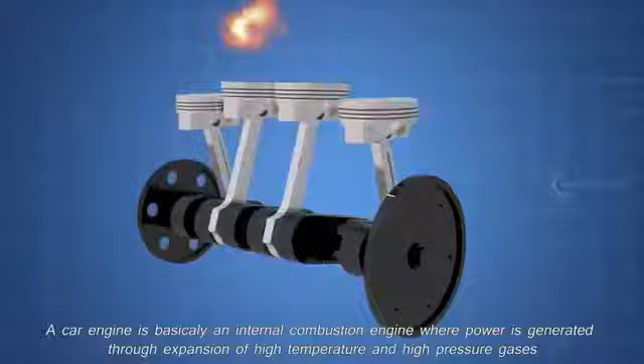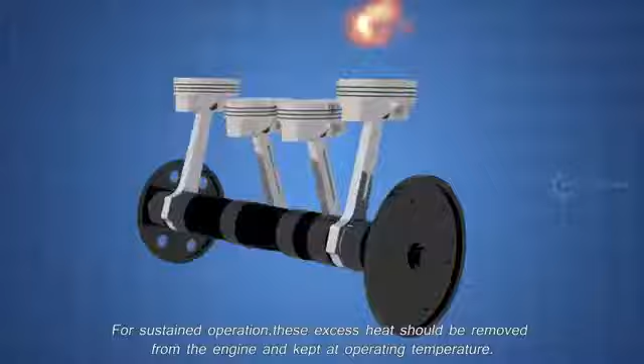A car engine is basically an internal combustion engine where power is generated through expansion of high temperature and high pressure gases. A lot of heat is generated due to the combustion gas and the friction of mechanical parts. For sustained operation, this excess heat should be removed from the engine and kept at operating temperature.

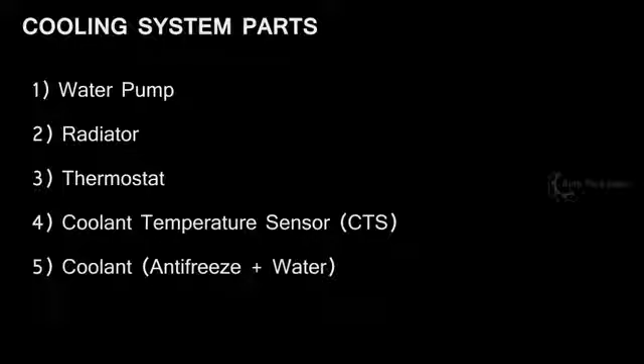Now let's see the parts involved in cooling the engine. The main parts for cooling the engine are water pump, radiator, thermostat, coolant temperature sensor, and coolant.

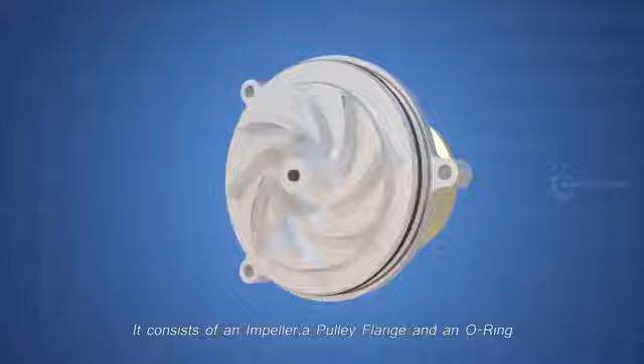First, the water pump. The water pump is the heart of the cooling system, which pumps the coolant. It consists of an impeller, a pulley flange, and an O-ring. The impeller is driven by the engine drive belt through a pulley.

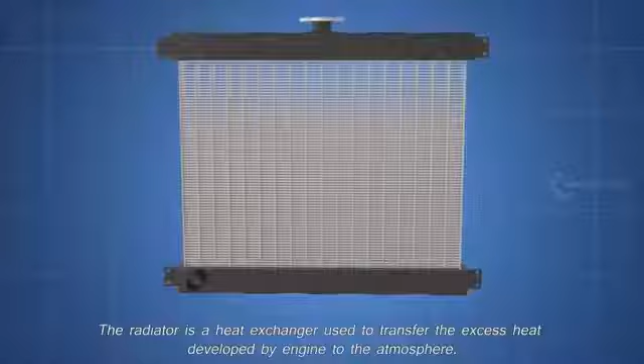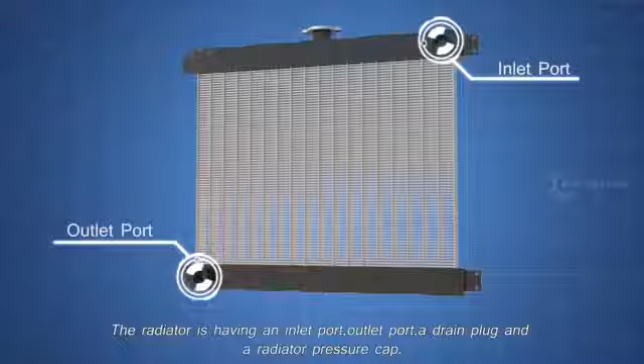Next, the radiator. The radiator is a heat exchanger used to transfer the excess heat developed by the engine to the atmosphere. The radiator has an inlet port, outlet port, a drain plug, and a radiator pressure cap. The radiator pressure cap plays a vital role in the cooling system, which will be explained later.

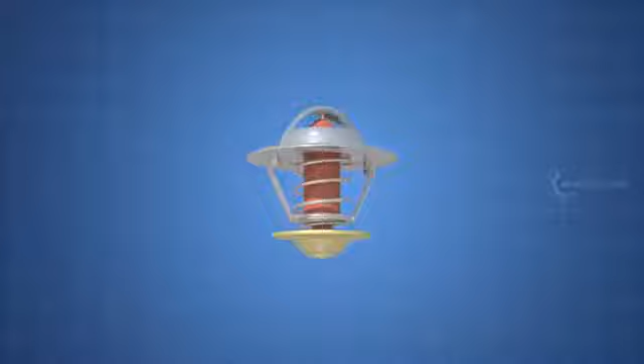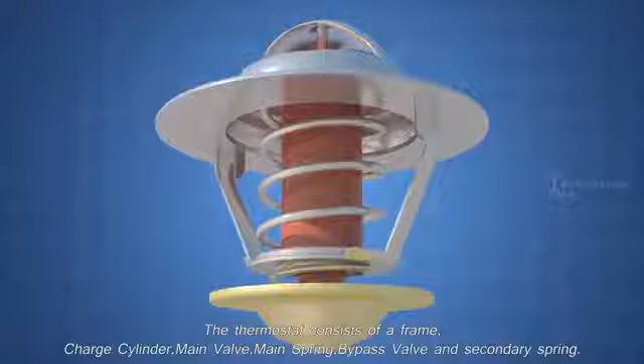Next, the thermostat. The thermostat is a valve which regulates the flow of the coolant and helps maintain the proper operating temperature for the engine. The thermostat consists of a frame, charge cylinder, main valve, main spring, bypass valve, and secondary spring.

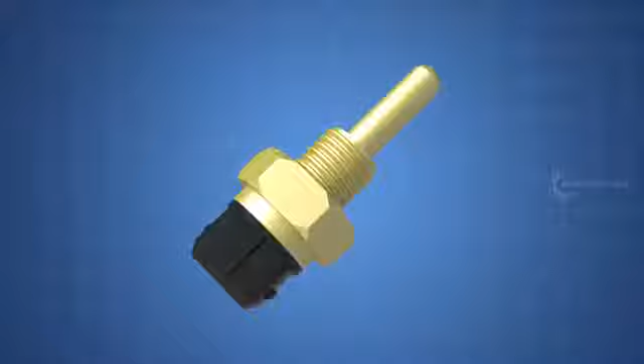Next, the coolant temperature sensor. The coolant temperature sensor is used to monitor the engine temperature. The ECU will use this data to manage fuel injection and ignition time. Some engines have more than one coolant temperature sensor. The data is also used to control the radiator fan and to update the temperature gauge on the driver console.

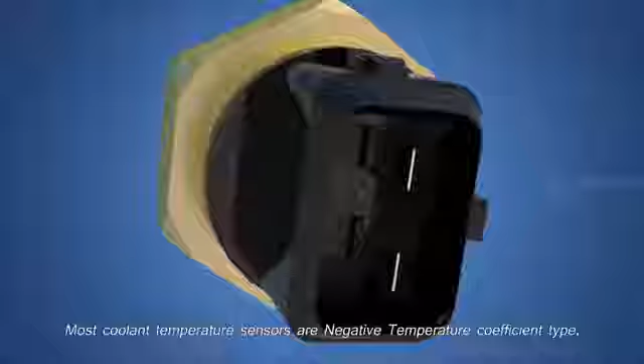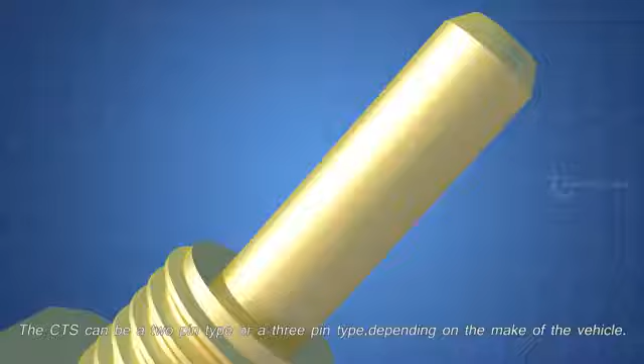The coolant temperature sensor consists of a sensing probe and an electrical connector. Most coolant temperature sensors are negative temperature coefficient type, meaning as the temperature increases, the resistance decreases. The CTS can be a 2-pin type or a 3-pin type, depending on the make of the vehicle. These are the main parts involved in an engine cooling system.

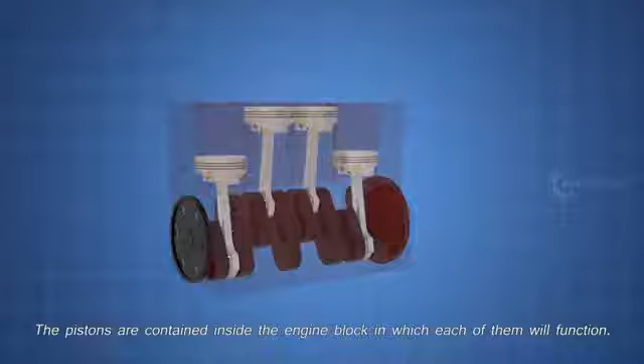Now let's see how these parts work together. The pistons are contained inside the engine block, in which each of them will function.

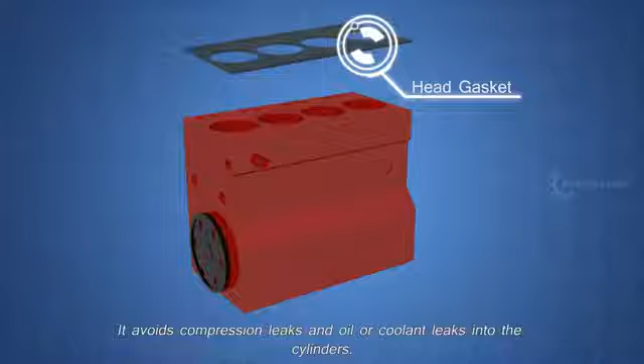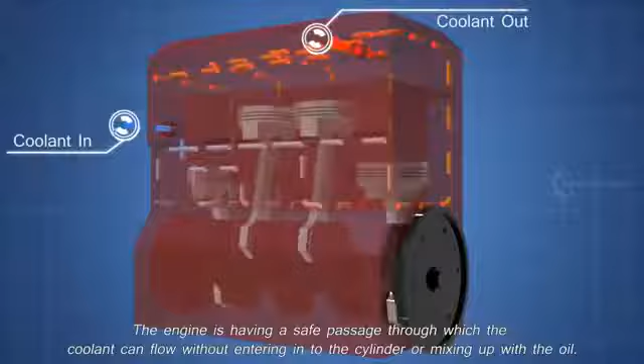Above the engine block comes the head gasket, which provides sealing between the engine block and engine head. It avoids compression leaks and oil or coolant leaks into the cylinders. Above that comes the engine head. The engine has a safe passage through which the coolant can flow without entering into the cylinder or mixing up with the oil. This passage is known as the water jacket.

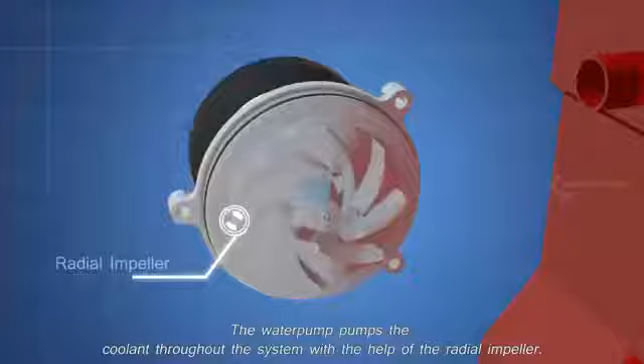Let's put the parts one by one and see how it works. The water pump pumps the coolant throughout the system with the help of the radial impeller. It is driven by the engine itself, using a serpentine belt. The serpentine belt also drives the power steering pump, alternator, and AC compressor, but for now only the water pump is shown.

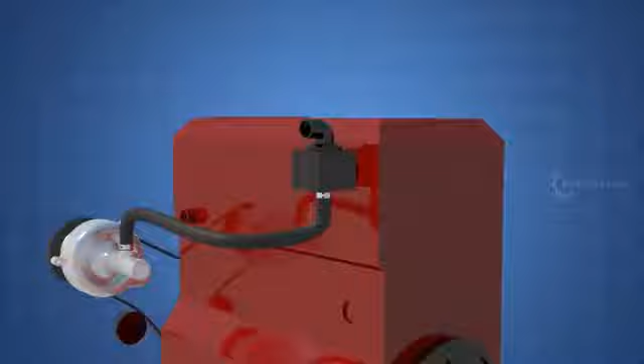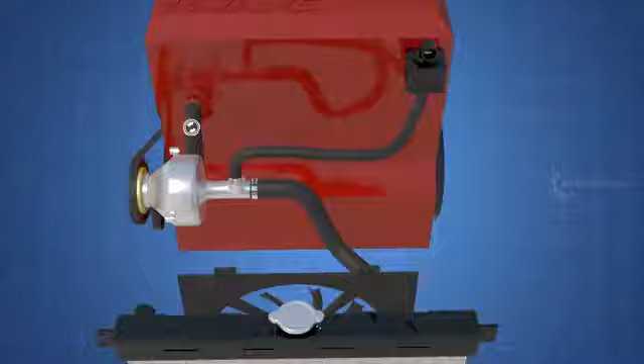Now let's see the connections: the thermostat bypass hose, the thermostat housing, inside the thermostat, the radiator and the radiator fan, the lower radiator hose, the water pump outlet hose, the upper radiator hose, the coolant expansion tank, the expansion bleed hose, and the coolant overflow hose. So, finally, let's get into the working, starting with the thermostat.

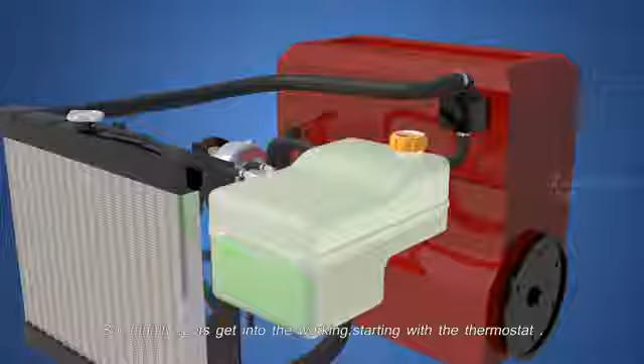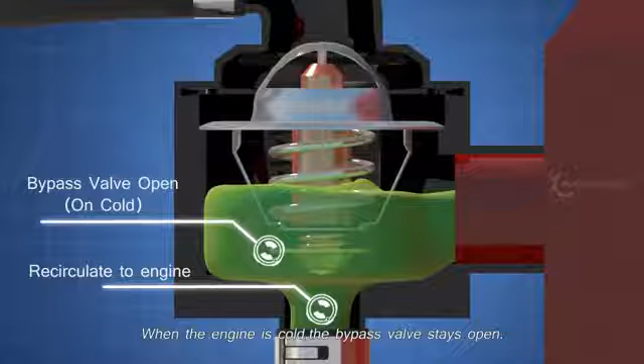The thermostat is actually a valve which regulates the flow of the coolant. It will always be covered in the coolant, so that the temperature can be sensed. Let's start the operation from a cold engine. When the engine is cold, the bypass valve stays open, so the coolant bypasses the radiator and recirculates through the engine. This helps the engine heat up to operating temperature quickly.

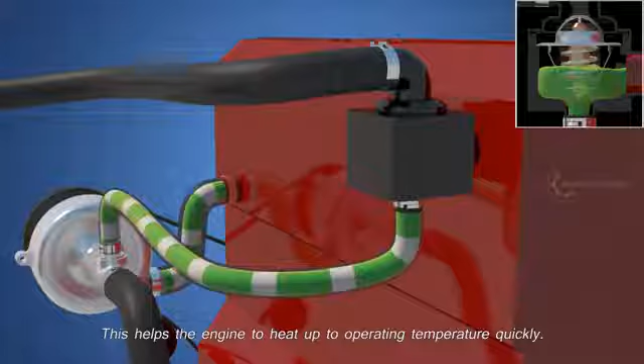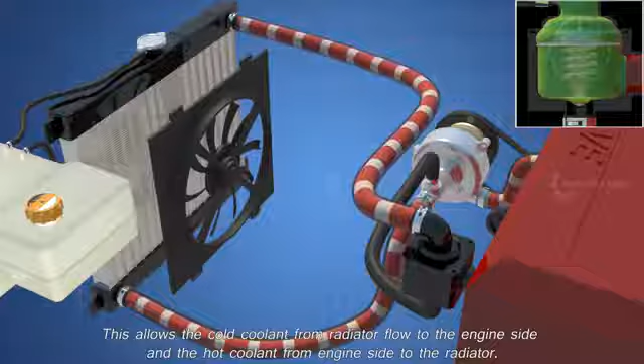Eventually, the coolant temperature increases by absorbing heat from the engine. Once the coolant starts to reach higher temperature, usually between 160 to 190 Fahrenheit, the bypass valve will start to close, and the main valve will start to open. This allows cold coolant from the radiator to flow to the engine side, and hot coolant from the engine side to flow to the radiator. In most cars, the coolant temperature sensor is located near the thermostat housing.

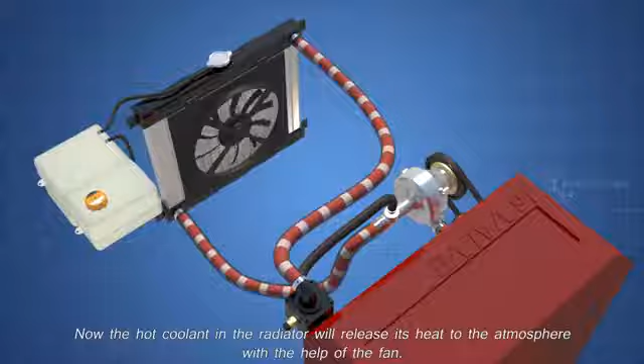It will turn on the radiator fan if the coolant to the radiator side is at high temperature. Now, the hot coolant in the radiator will release its heat to the atmosphere with the help of the fan. At the same time, the cold coolant received from the radiator will start to absorb heat from the engine for the next cycle.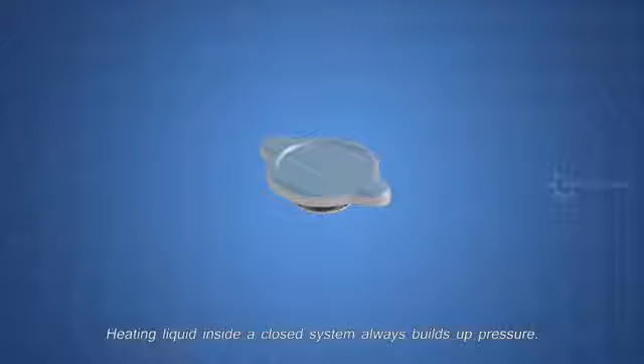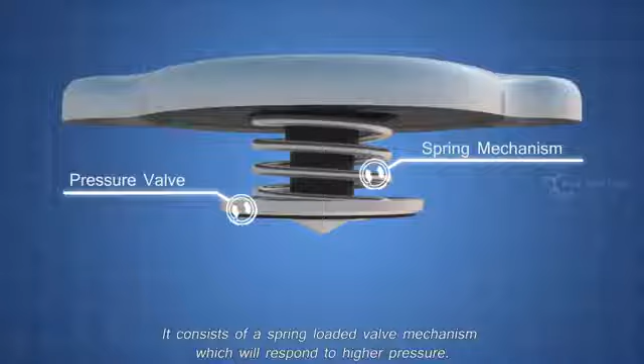Heating liquid inside a closed system always builds up pressure. So how to maintain the pressure? Here comes the role of the radiator pressure cap. It consists of a spring-loaded valve mechanism, which will respond to higher pressure.

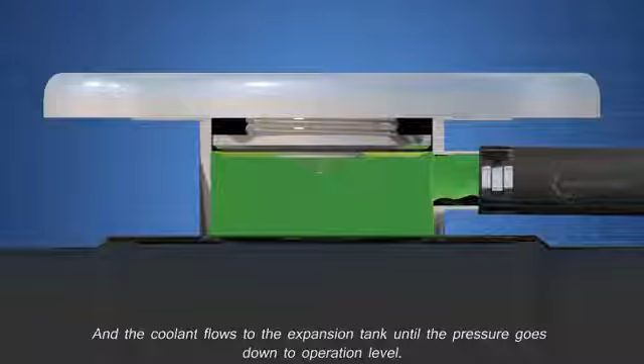Reaching a pressure above 15 psi will push the pressure cap valve, and the coolant flows to the expansion tank, until the pressure goes down to operation level. And when the system cools down, the vacuum inside the system sucks back the coolant from the expansion tank.

In case there is too much pressure buildup in the system, due to trapped air or other failures, the coolant in the expansion tank will be pushed out through the overflow hose.

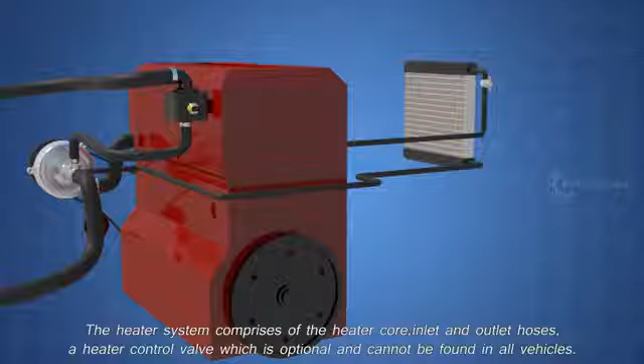The car heater system is a part of the engine cooling system. The heater system comprises the heater core, inlet and outlet hoses, and a heater control valve, which is optional and cannot be found in all vehicles. The heater core acts as a radiator, dissipating heat from the hot coolant to the vehicle interior, using a blower.